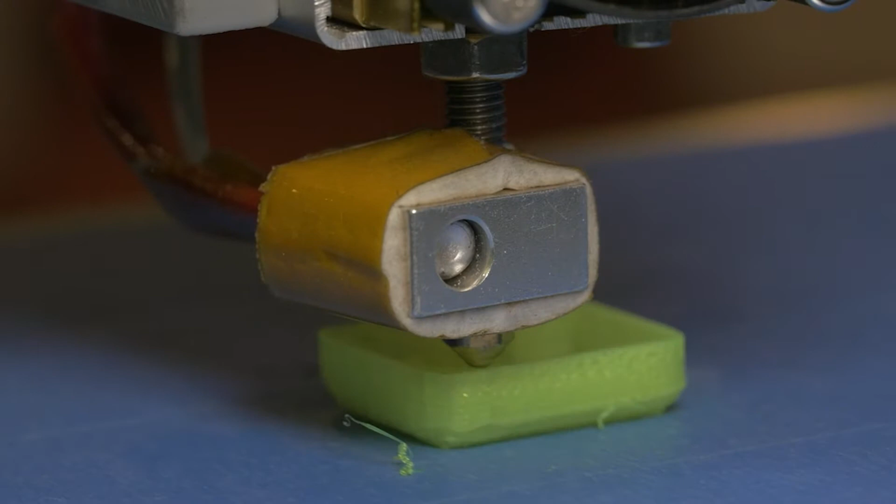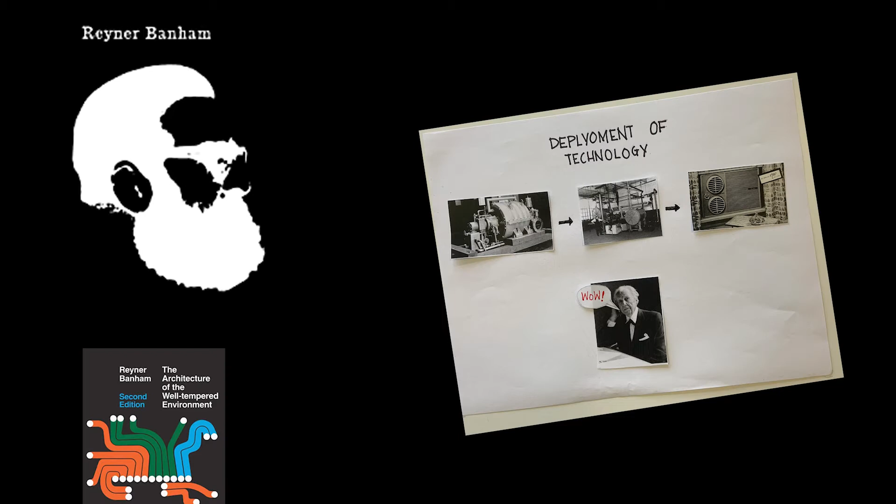As we already know, technology is not only overpowering architecture but has also now started to adapt to an uncertain future. As Banham suggested in chapter 2, evolution in architecture was interrupted by the interference of technology.

To support his argument, Banham analyzed the performance of building envelopes from traditional to modern architectural style, and concluded that architecture only acts as an outer shell around technology. By this, he formulated the definition of modern architecture.

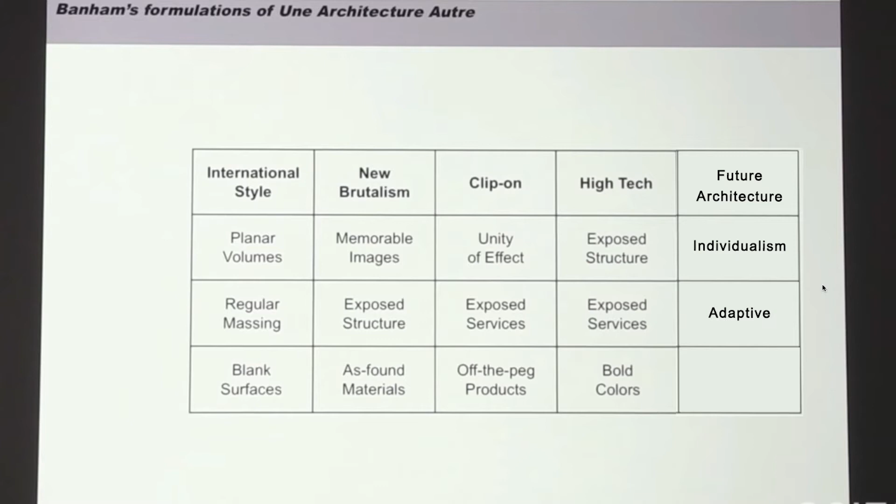Looking at the dystopian future, the nature of architecture and technology together will frame the definition, evolving around individualism, adaptation, and mass production.

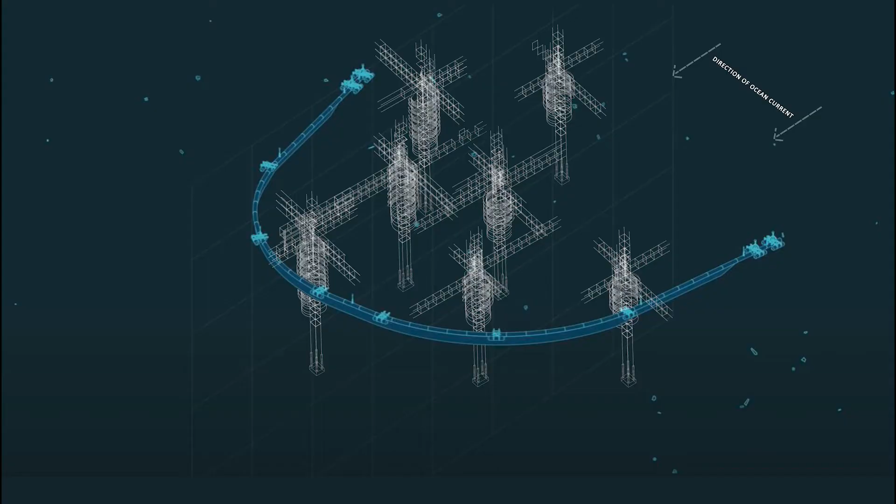Using this artificial coastline responding to the ocean currents, we can start speculating future ocean dwellings along with these artificial coastlines, which is System 001.

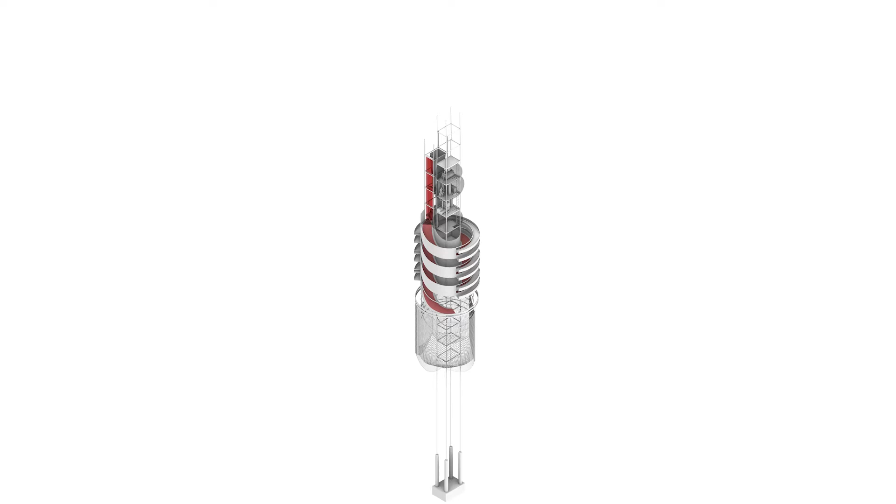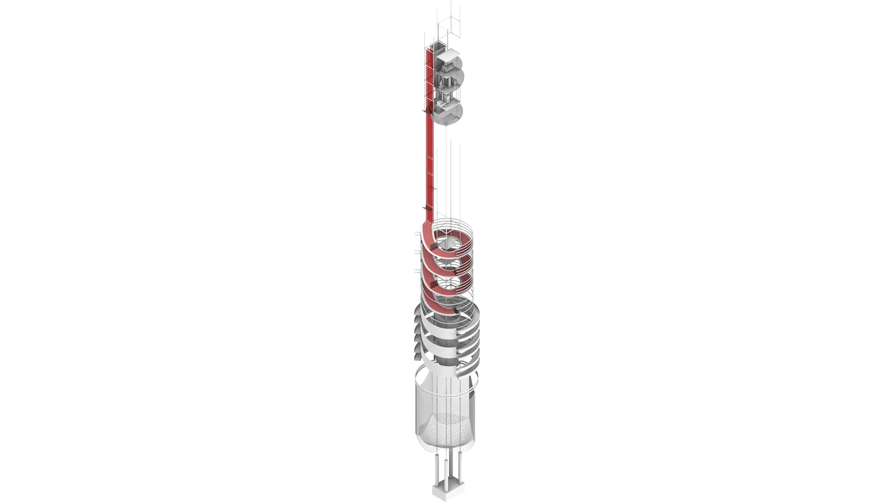This self-sufficient module functions with three machines: 3D printing, a plastic collector and conveyor belt, and vertical farming. The conveyor belt collects plastic from the ocean and transfers it to the plastic collecting machine, which converts it into 3D printing coil.

These coils are used to expand the structure vertically, adapting to sea level rise in the future, and horizontally to produce and live according to their needs.

The expansion of the horizontal ad hoc will also expand the range of the secondary net, adding up to the primary collecting net in a centric direction.

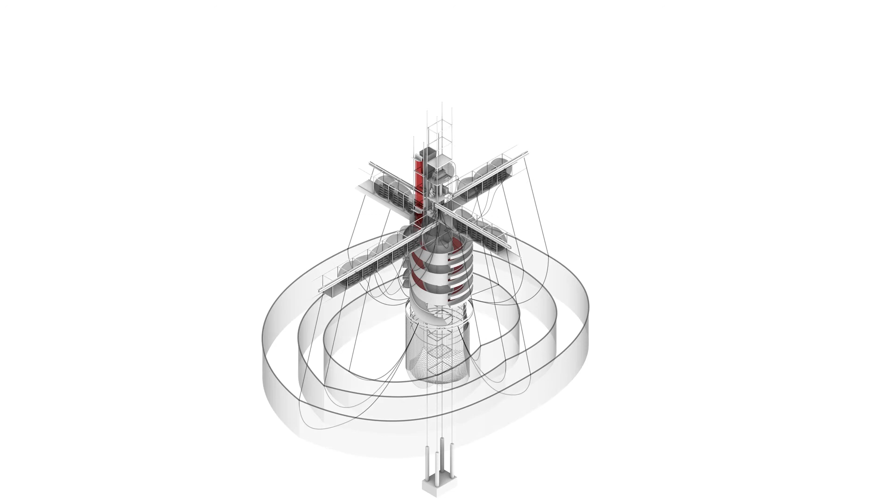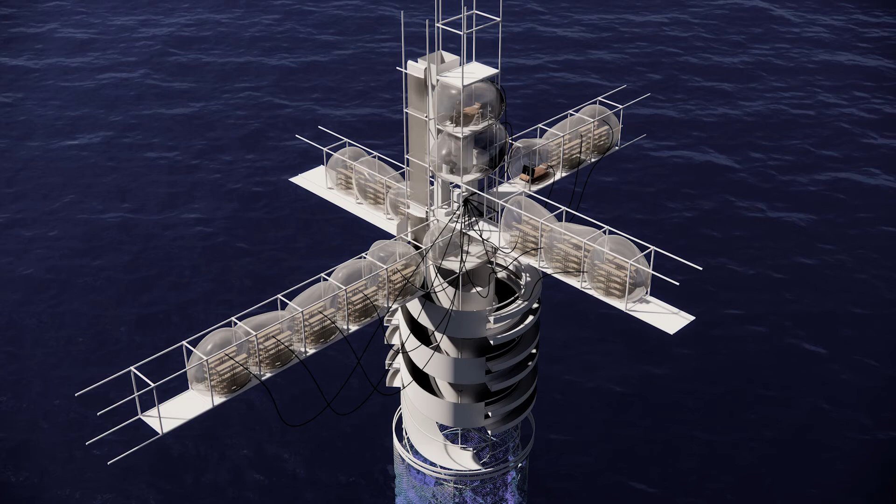The temperature-controlled spaces inside will work on mechanical ventilation systems, which will inflate and deflate according to occupancy. This will help in consuming limited renewable resources.

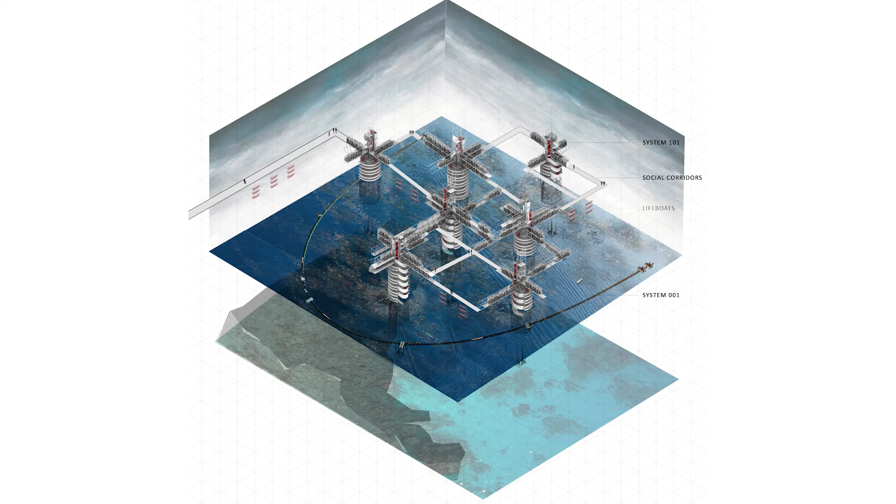The artificial coastlines formed by System 001 will shape one cluster with a group of System 101. These individual structures will then be connected to each other by bridges within one artificial coastline, forming a chain link influenced by ocean currents.

These corridors can act as socially interactive spaces and also as emergency evacuation exits during disasters.

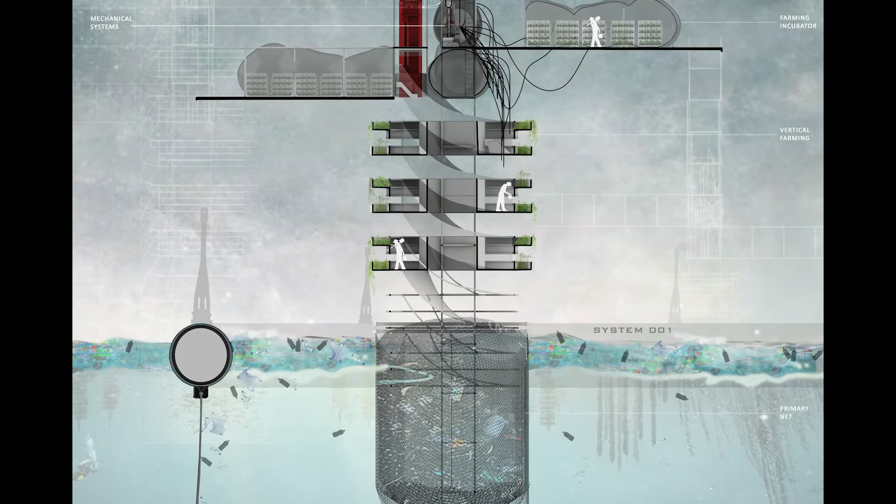A home is not a house, but it will be about retaliating against a dystopian future by adapting, consuming, and producing.